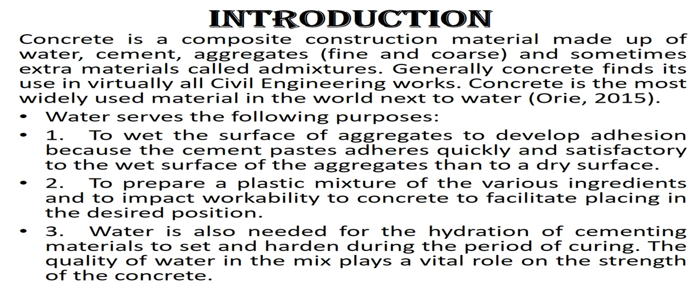Water serves the following purposes. Number 1, to wet the surface of aggregates to develop adhesion, because the cement paste adheres more quickly and satisfactorily to the wet surface of the aggregate than to a dry surface. 2, to prepare a plastic mixture of the various ingredients and to impart workability to concrete to facilitate placing in the desired position. 3, water is also needed for the hydration of cementing materials to set and harden during the period of curing. The quality of water in the mix plays a vital role on the strength of the concrete.

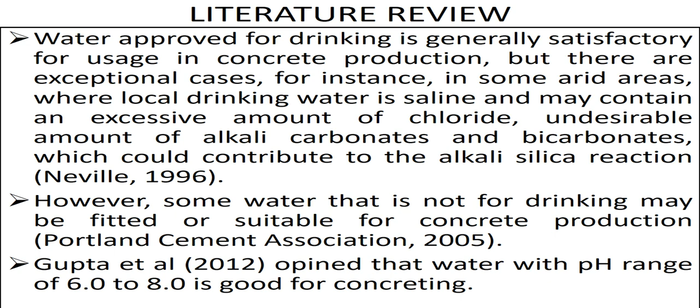Water approved for drinking is generally satisfactory for usage in concrete production, but there are exceptional cases. For instance, in some arid areas local drinking water is saline and may contain an excessive amount of chlorides, or undesirable amounts of alkali carbonates and bicarbonates, which could contribute to the alkali-silica reaction. However, some water that is not for drinking may be fit or suitable for concrete production. The aim of this work is to compare the compressive strength of concrete mixed with different sources and qualities of water.

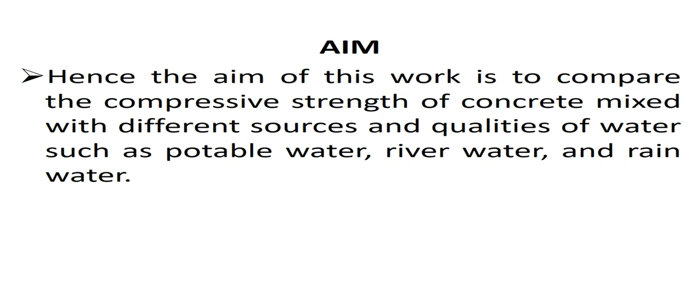The research was concentrated on sources of water from Nsukka environs. The sources are rain, river, and potable water. At each of the water locations, a 25 liter gallon was used to collect water samples. These samples were taken to a water analysis laboratory, and the physicochemical compositions of these water qualities were analyzed and ascertained using standard methods. The coarse aggregate used was granite with an average size of 20 mm. The fine aggregate was river sand. The cement was ordinary Portland cement.

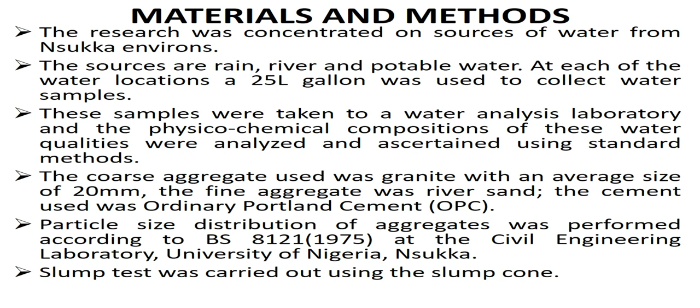Particle size distribution of aggregates was performed according to BS 812 1975 at the Civil Engineering Laboratory, University of Nigeria, Nsukka. Slump test was carried out using the slump cone. Aggregate impact value was done using an aggregate impact value machine. Moisture content was ascertained with moisture content apparatus, and finally the compressive strength test was carried out.

The total quantity of materials used in the concrete production were 23.22 kg of cement, 11.61 kg of water, 46.44 kg of fine aggregate, and 92.88 kg of coarse aggregate to produce a concrete mix of 1:2:4. The batching was done by weighing. The mixing of concrete was done manually at a water-cement ratio of 0.5. Concrete cube production was carried out in accordance with BS 1881 Part 108 1983 using cubical molds of size 15 by 15 by 15 cm.

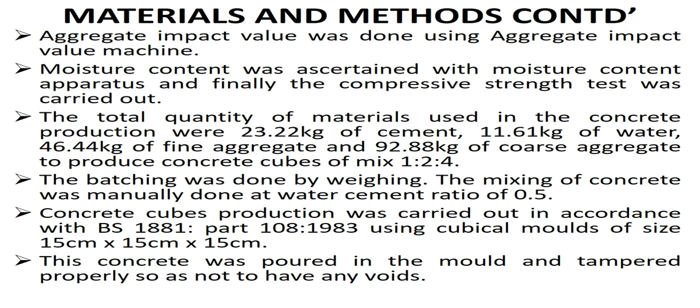The concrete was poured into the mold and tamped properly so as not to have any voids. Each layer of concrete receives 25 strokes of a 25 mm square steel rammer. The top surfaces of these specimens were made even and smooth by putting cement paste and spreading smoothly on the whole area of the specimen. After 24 hours, these molds were removed and test specimens immersed in water for curing.

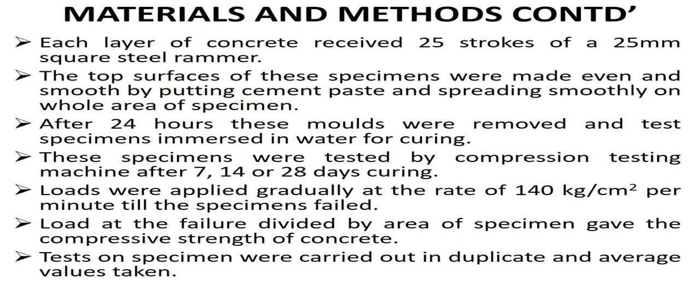These specimens were tested by compression testing machine after 7, 14, and 28 days curing. Loads were applied gradually at the rate of 140 kg per cm square per minute till the specimens failed. Load at failure divided by area of specimen gave the compressive strength of concrete. Tests on specimens were carried out in duplicate and average values taken.

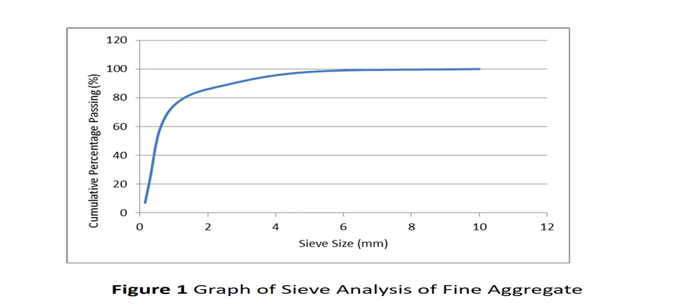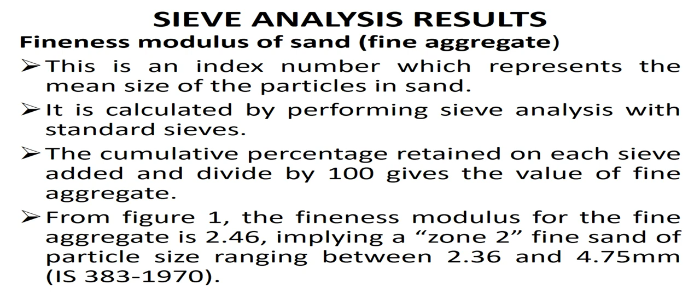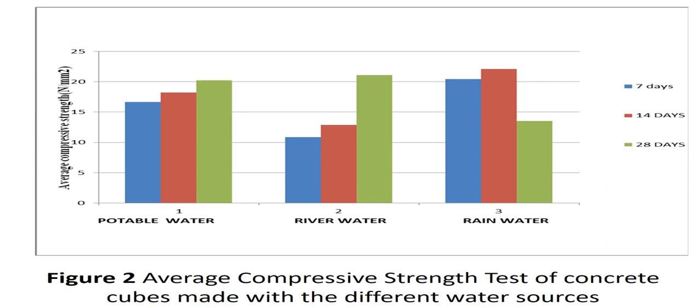Table 2 shows the properties of concrete cubes made from different sources of water. Figure 2 shows average compressive strength test of concrete cubes made with different water sources. Discussion on slump test results. Table 2 shows results for the slump test. It can be seen that concrete made with potable water had a slump value of 20 mm, which indicates a true slump and signifies low workability.

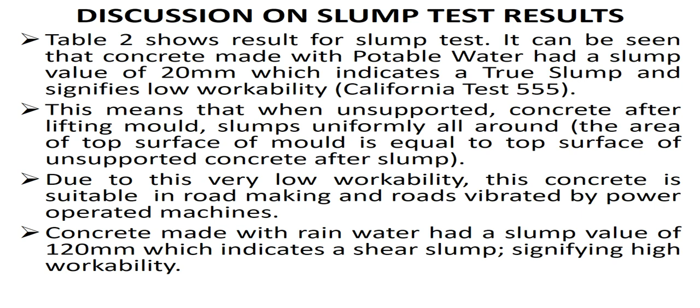This means that when unsupported, concrete after lifting the mold slumps uniformly all around. The area of the top surface of the mold is equal to the top surface of unsupported concrete after slump. Due to this very low workability, this concrete is suitable in road making and roads vibrated by power-operated machines. Concrete made with rainwater had a slump value of 120 mm, which indicates a shear slump, signifying high workability.

This means that one half of unsupported concrete, that's the frustum of the cone, will slide down along the inclined plane.

If shear slump continues, the concrete can be described as having a harsh mix, that is, a mix that shows lack of cohesion. This concrete is suitable for sections with congested reinforcement, but it is not normally suitable for vibration.

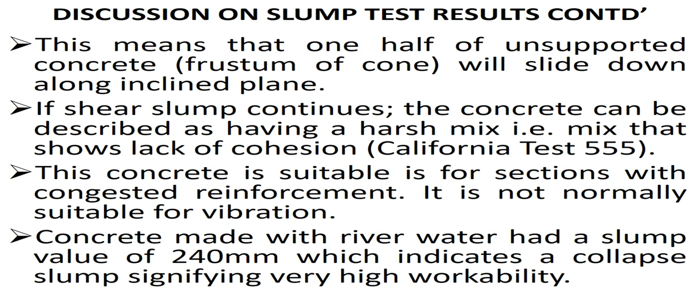Concrete made with river water had a slump value of 240 mm, which indicates a collapsed slump, signifying very high workability. Next, the aggregate impact value results.

Table 2 also shows the aggregate impact value test. The value obtained from the aggregate impact value (AIV) test conducted was 25%, and an AIV of 25% falls into the category of classification as satisfactory for road surfacing and wearing courses.

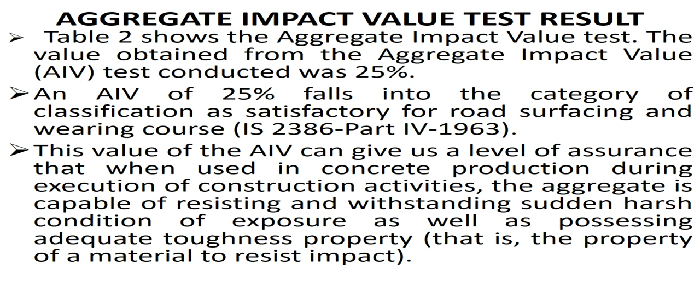This value of the AIV can give us a level of assurance that when used in concrete production during execution of construction activities, the aggregate is capable of resisting and withstanding sudden harsh conditions of exposure, as well as possessing adequate toughness property, that is, the property of a material to resist impact.

Total moisture content test results. Table 2 also shows the total moisture content test. The value obtained from the total moisture content test carried out was 0.39%.

This implies that the amount of moisture, that's water, contained in the fine aggregate was about 0.39%, implying an air-dry (AD) fine aggregate. That is, all moisture is removed from the surface, but internal pores are partially full.

The AD represents the variable moisture content that will exist in stockpile aggregates.

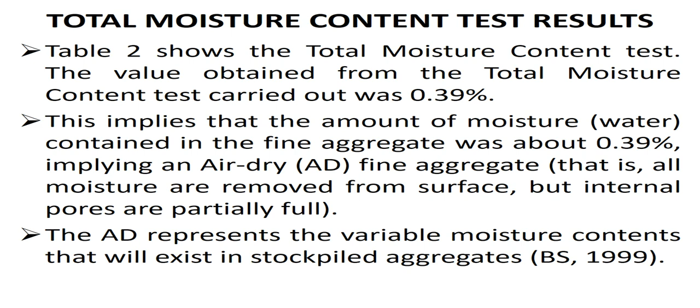Figure 2 shows the result of the average compressive strength test. The average compressive strength for concrete made with potable water increased with age, which are 16.67 Newton per mm square, 18.22 Newton per mm square...

...and 20.22 Newton per mm square, corresponding to strength at 7 days, 14 days, and 28 days respectively.

This implies that the 7-day strength is less than the 14-day strength, and also the 14-day strength is less than the 28-day strength, signifying that the strength increased with age, and the maximum strength was achieved on the 28th day.

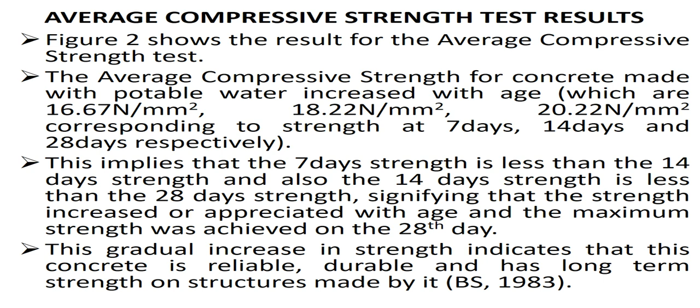This gradual increase in strength indicates that the concrete is reliable, durable, and has long-term strength on structures made by it.

The average compressive strength for concrete made with river water also increased with age: 10.89 Newton per millimeter squared, 12.89 Newton per millimeter squared...

...and 21.11 Newton per millimeter squared, corresponding to strength at 7 days, 14 days, and 28 days respectively. This implies that the 7-day strength is less than the 14-day strength, and the 14-day strength is less than the 28-day strength, signifying that strength increased with age, and maximum strength was achieved on the 28th day.

It is to be noted that even though the compressive strength of concrete made with river water increased with age like that of potable water, in the case of river water, the increment was very sharp after the 14th day. This concrete can also be reliable, durable, and have long-term strength on structures made by it.

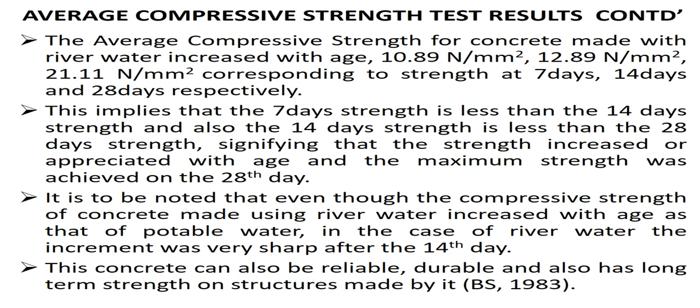The average compressive strength for concrete made with rainwater increased with age: at 7 days, 20.45 Newton per millimeter squared, and at 14 days, 22.11 Newton per millimeter squared.

But there was a sharp, drastic reduction in strength on the 28th day, that is, 13.56 Newton per millimeter squared. That is, strength at 28 days is far less than that at 7 days and 14 days.

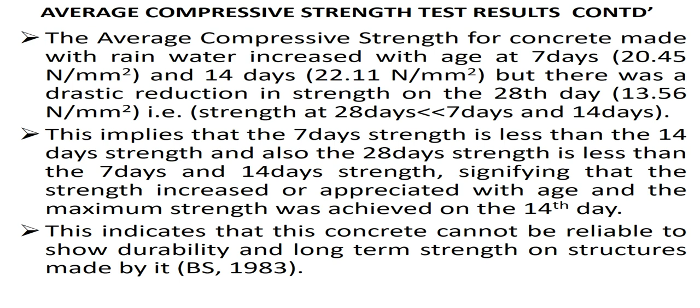This implies that the 7-day strength is less than the 14-day strength, and the 28-day strength is less than both the 7-day and 14-day strength, signifying that strength did not continue to appreciate with age, and the maximum strength was achieved on the 14th day. This indicates that this concrete cannot be relied upon to show durability and long-term strength in structures made with it.

While the concrete produced with rainwater gradually increased too, but later decreased in strength at 28 days of age. The results indicated that the source of water used in mixing concrete has a significant impact on the compressive strength of the resulting concrete.

It concluded by suggesting that potable water is the best water type for concrete production, since the concrete cubes obtained from it gain appreciable strength with age.

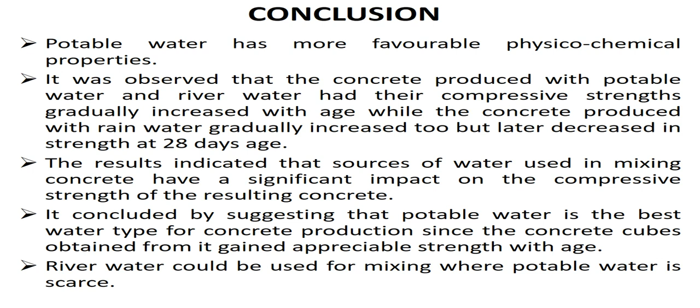River water could be used for mixing where potable water is scarce. Recommendation: this work has the following recommendations.

Potable or fresh water should always be employed in the production of concrete to enable it to attain maximum compressive strength over time. All water intended to be used for production of concrete must be evaluated to make sure it conforms to the laid down standards.

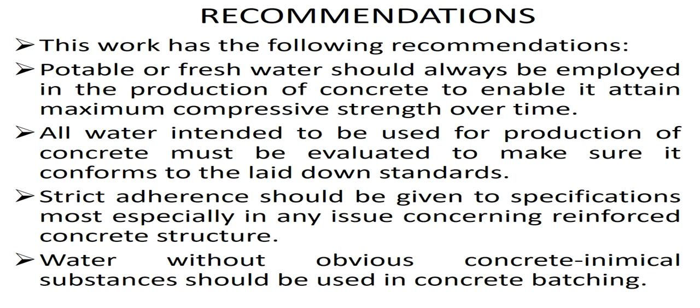Strict adherence should be given to specifications, most especially in any issue concerning reinforced concrete structures. Water without obvious concrete-inimical substances should be used in concrete batching.